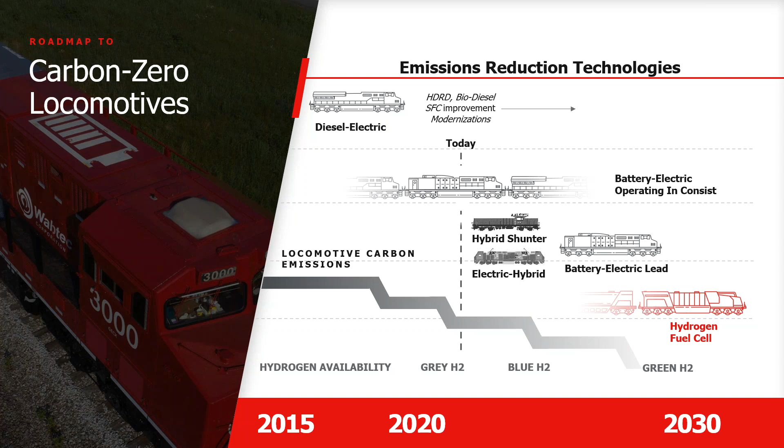Flex Drive journey started in 2007 with the introduction of Wabtec's first battery hybrid locomotive at the time, utilizing dynamic braking technology and building on many decades of manufacturing tens of thousands of diesel electric locomotives. So the move from diesel electric to fully electric seems like a natural move. And in addition to battery electric technology, Wabtec is investing in other emission reduction technologies such as hydrogen fuel cell and biodiesel.

Let's talk about the very first generation of Flex Drive, also known as Flex Drive 1.0. This is the first generation heavy haul battery electric locomotive. It was tested in revenue service with Class 1 Railway BNSF and CARB, California Air Resources Board. The locomotive completed over 13,000 miles, over 36 missions, saving about 11% of fuel, 6,200 gallons to be exact.

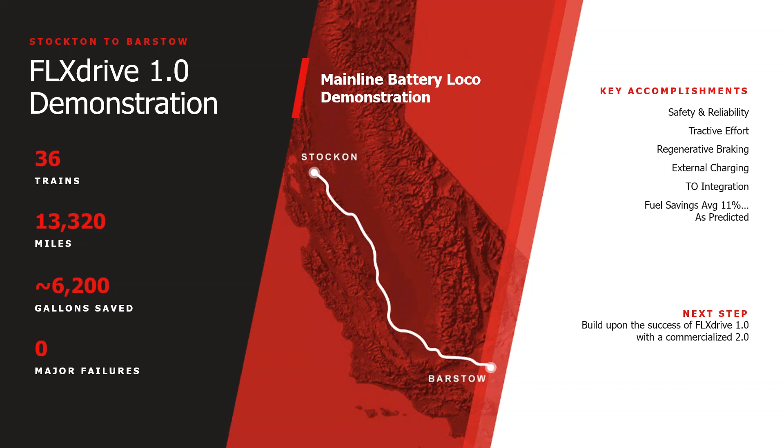The locomotive is able to operate in a consist of locomotives. So this is not a single operated locomotive. And it's managed by Wabtec Cruise Control System, also known as Trip Optimizer. And Trip Optimizer warrants its own presentation someday. Basically, Trip Optimizer within the Flex Drive operates the throttle and the braking utilizing real-time train load and terrain data to optimize battery usage and maximize regenerative charging power.

When we talk about the Flex Drive mainline locomotive, the success paved the way to the Flex Drive 2.0. This is another commercial battery electric locomotive that is able to deliver up to 8.5 megawatt hours of battery capacity with haulage capability of its diesel electric cousin locomotive. The Flex Drive 2.0 is also designed to replace a diesel electric locomotive within a train consist. Wabtec builds on its service-proven locomotive architecture with a new design of a liquid-cooled battery technology and thermal management system to optimize the energy performance and the battery life.

When we talk about various applications of battery electric locomotive, Flex Drive expands on other rail applications. That includes freight medium haul, yard and switching operations, which could include marine, ports, and terminals. And finally, we're deploying similar technology for passenger and transit applications.

Flex Switch is very relevant to today's conversation because in recent years, we are seeing a major push for ports and terminals to reach net zero by 2030 and beyond. For example, last year, Wabtec partnered with the Port of Miami and AAPA Latino in Santos to convey the very exact message.

Andy and Eric, if you're there, I want to say hello and thank you.

We're seeing similar trends in Canada and across the globe. For example, the expansion of the Port of Montreal in Contrecoeur, with an ambition and a mission to have a fossil-free port operation.

So a few words on this application. It's a diesel-electric switcher replacement with an AC traction system up to 32 tons per axle. Depending on the application, you may get a Bo-Bo or Co-Co configuration with 4 to 6 axles with single axle control, depending on the curves and the restrictions that you have in the vicinity of your port.

This is a 2.4 to 4 megawatt hour battery, with most applications needing only one charge per day, about 1.5 megawatt hours in 20 hours, and gives you ample time to recharge in the 2 to 4 hours to 90% capacity.

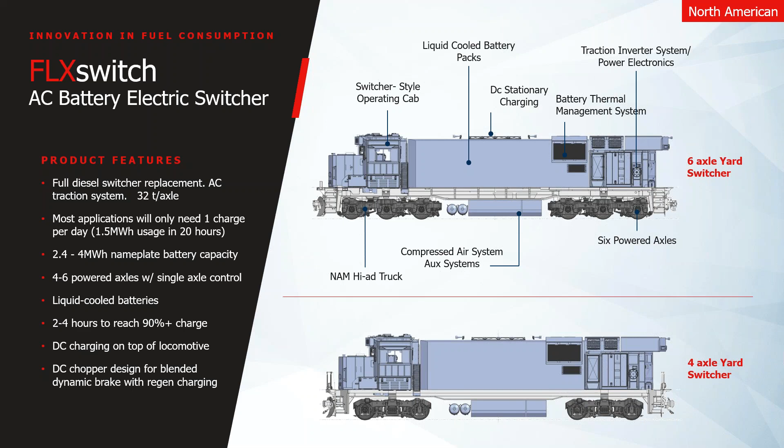When we talk about Flex Drive and Flex Switch, these are locomotives that feature DC fast charging systems, utilizing stationary pantograph or even a plug-in option that includes a moving charge capability for increased range and a non-interrupted operation. The battery system arrangement is modular and scalable and designed to integrate across multiple rail applications and vehicles to be able to provide some flexibility in the field.

Let's talk about adoption. When we talk about market adoption of FlexDrive, it's fair to say it takes a village. This is a major shift in technology, impacting how the transportation system operates and uses energy sources for its prime movers.

That's why Wabtec is partnering with strategic suppliers to push FlexDrive performance further and faster. We are partnering with public and private entities through grants and other funding opportunities to accelerate development of battery electric technologies. We are pleased to announce we have customers worldwide ready to integrate FlexDrive into their mission-critical operations.

Post the deployment of FlexDrive 1.0 and 2.0, customers are slowly dipping their toes into the technology across the globe. We're seeing customers such as Rio Tinto, BHP, Roy Hill, Canadian National, and Union Pacific, and we hope to share more of these exciting developments in the future.

With that, I will relinquish control of this webinar to Byron, so he can talk to us about smaller electrified vehicles, but equally just as important. Byron, take it away. Thank you, Sofiane.

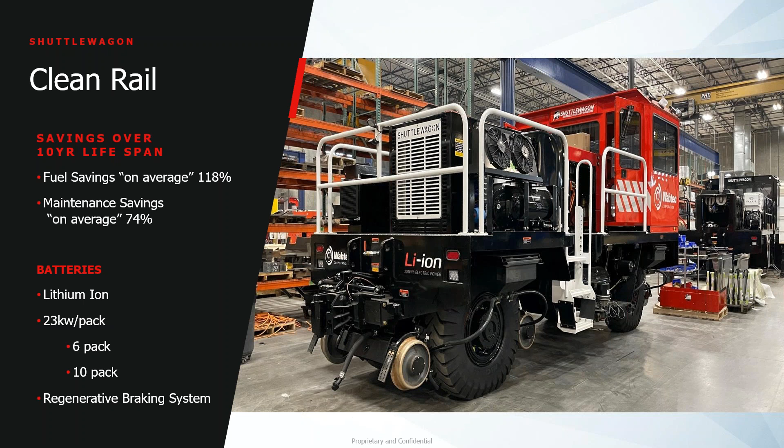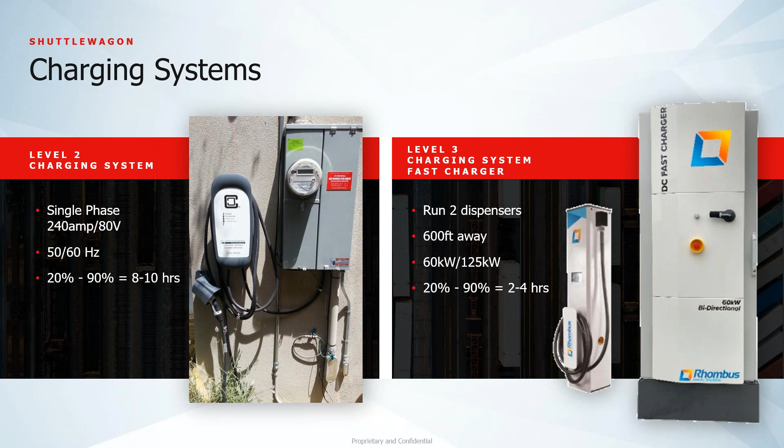Next slide, please. These are the two charging systems. We have a single phase, 240 amp, 80 volt system—that's what you could consider a trickle charge. The 20 to 90% charge rate is 8 to 10 hours. Those are more of a backup.

There's the upgrade to a Level 3. You can see the photo on the far right—that's the actual electric station, and in the smaller photo with the stand is the actual charge cable. You can run two dispensers at a time. You cannot charge at the same time, but it gives you almost 1,200 feet of difference to do the opportunity charge. With a fast charger, the 20 to 90% charge time is 2 to 4 hours, and you can also opportunity charge during your operation.

Our engineering department will be happy to work with you on your operation, to see how maybe you need a 15-minute longer break or a small interval where you can top up to finish your operation or your day. We do have applications running 6 units in California, and we've worked with them on adjusting their schedules to fit the time needed to move the rail cars.

Some applications do get regenerative braking back, up to 50%, so they can move that last string of cars. The current model will move up to about 30 loaded rail cars on a flat, straight track. We would definitely recommend a track survey to make sure this unit will fit, and to work with your port areas to understand there is an instant 100% tractive effort—once you push go, it's not a diesel engine, so there is a bit of a learning curve when you go to electric.

Next slide, and I will hand it off to the next one. Thank you.

Well, good day, everybody. My name is Greg Reese. I'm the North American Business Manager for Wabtec Maritime Electrification Products, including ferry charging systems, and the topic I'm going to discuss right now is shore power systems. I've been with Wabtec for nearly 9 years. I was an engineer at General Motors before that, and spent considerable time in the military and aerospace sectors before that.

As noted today, I'm going to briefly discuss shore power, known as cold ironing, along with some of the rationales for doing it, some of the challenges, and I'll briefly review some of the deployed units that we have in service at this time. Okay, we're off to the next slide.

As a result, there are commercial and financial incentives in place to increase the adoption of shore power and decarbonizing. Soon operators will have to pay for their carbon credits and their emissions, and as a result, the operators in cruise lines and such are approaching the ports and asking for shore power, making sure that it's available to them wherever they go. Next slide, please.

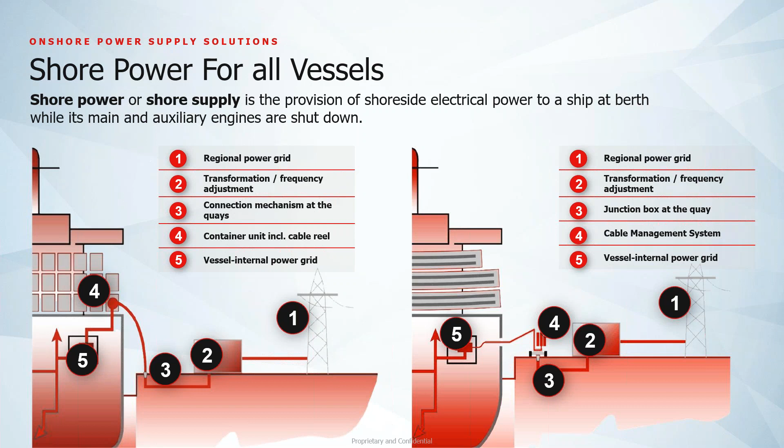Next slide, please. As I mentioned, one of the challenges is the docks. They are very inconsistent. I've been to many, many docks, and first of all, they tend to be very cluttered, have a lot of gear on them that you can't move.

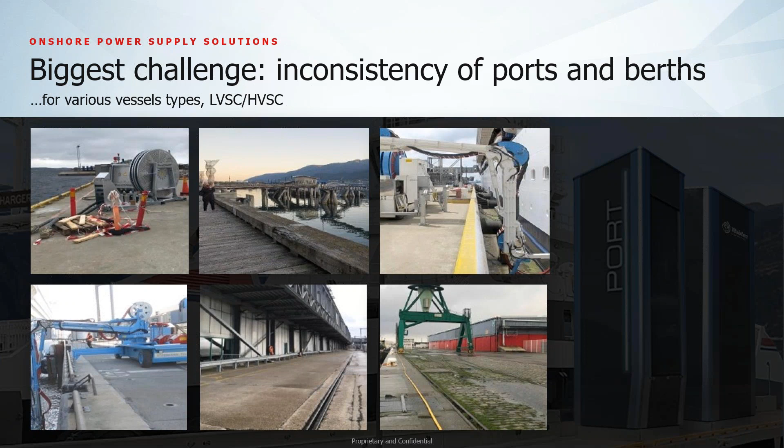And the one thing that we found that's very consistent is inconsistency. They're all built independently. They're all different terrains, different tides. Just each one is unique. Part of the problem, part of the challenge and the opportunity, is to make a system that can adapt to or be adapted to any of these berth challenges. Next slide, please.

A lot of times grid modifications have to be implemented. Sometimes additional power substations have to be created and things like that. So these demand a lot of power sometimes, and you have to make sure that that's done. Typically, most of the ports I've worked with are doing a feasibility study with the electric company at the front end of their project to make sure they have all that in place. Next slide, please.

Okay, so here is an example of a shore power system that we have deployed in Hamburg, Germany. I call it our most complete system because it's a mobile cable management system, and it doesn't have a junction box. It has an energy chain, which is a costly feature, but this dock doubles as a road during the day, and these plates have to handle 90 tons, and it can be operated by one person. I've done it. It's pretty cool. With the remote control, you can just drive it up and down the dock.

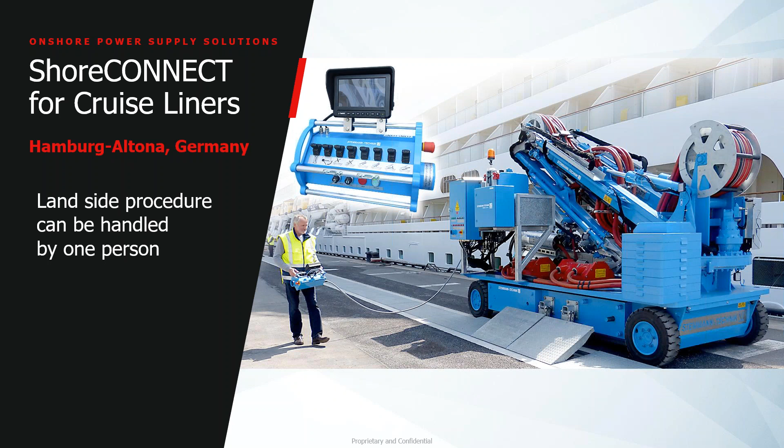So I'm giving you kind of high-level overviews because there's a lot of different kinds of equipment. And here's some more detail about the one in Hamburg. One thing to keep in mind, you'll notice the IEEE notification on this slide. Well, actually, I don't see it at this point, but these systems are all designed to IEEE 80005, which is a standard that's been adopted for shore power. Basically, that allows any cruise ship that adheres to the standard, is designed to the standard, to power up at any dock that is also built to the standard.

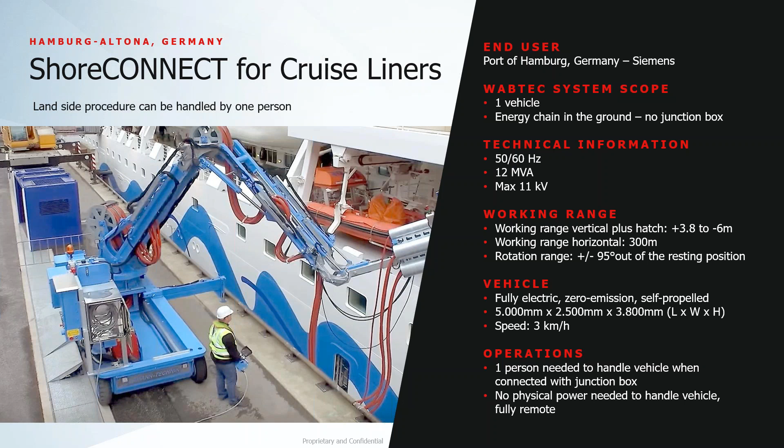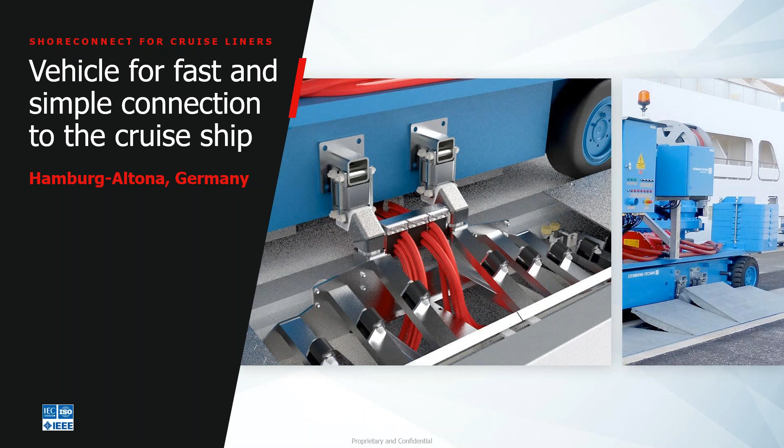Here's a little look inside the energy chain, just because it's kind of impressive. It was quite an undertaking, a lot of civil works and construction to install that. It's a very elegant solution, but certainly not the most cost effective.

This is a simpler solution when called for. Basically, it's a pedestal crane that just drops the cables out. Obviously it's much more cost effective than some of the shore power systems I just showed you, but obviously the aesthetics aren't there either.

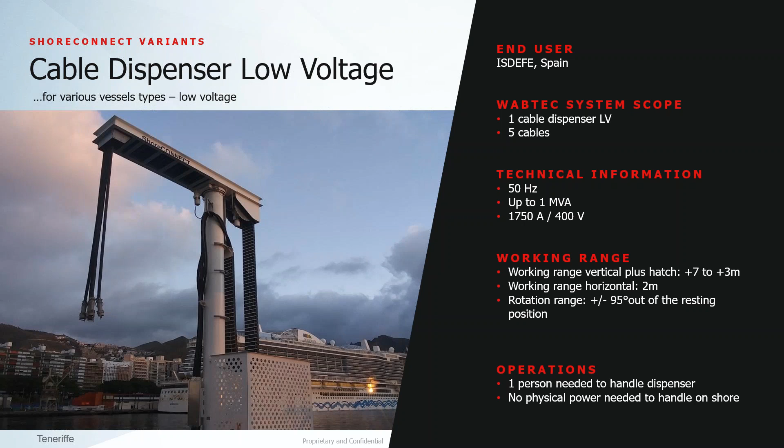This is a variation on the theme, kind of marrying together the articulating arms that are on the mobile units to a pedestal crane.

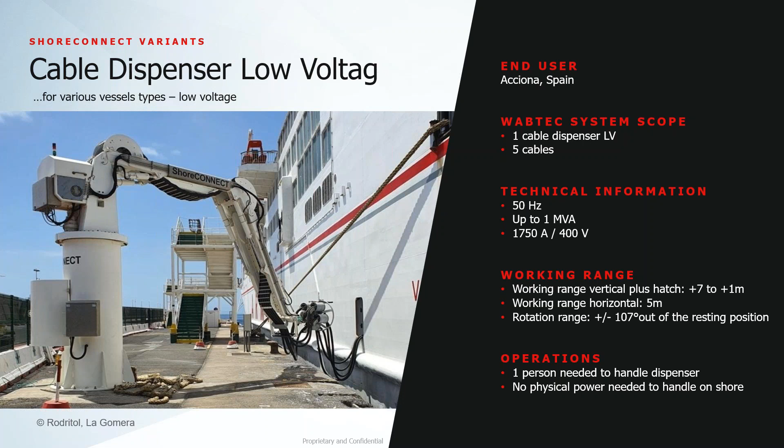This is a movable socket, primarily for cargo, but it can be for anything. The cable reel on top can traverse left to right, and it can account for hatch inconsistencies, because between vessel to vessel, or at least type, there are always going to be variances.

Here's a very simple unit that can be forklifted around a dock and deposited anywhere you have a junction box, and then you can marry it right up to the ship.

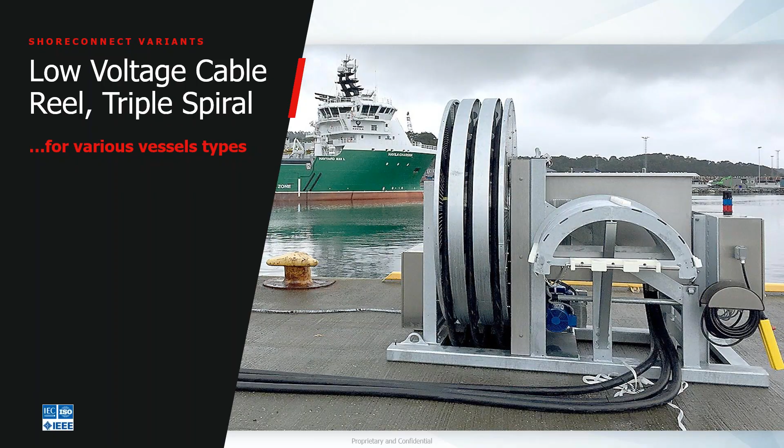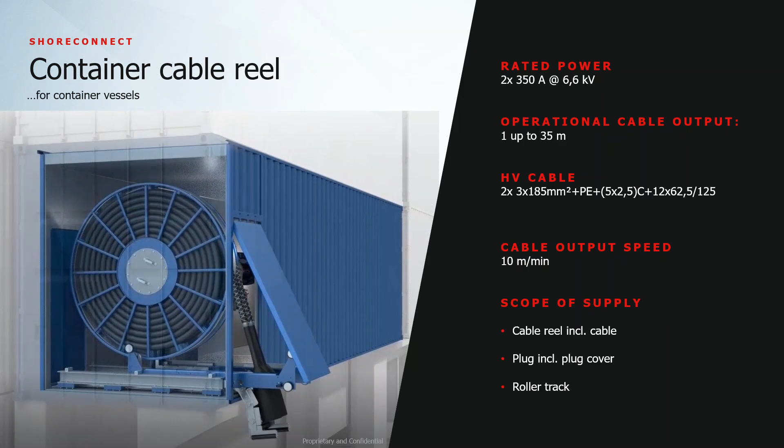Here's a real world example of one. One more, thank you. Here's a real world example of one. This is just an example of many that we've deployed out in the field.

On that note, I'll go ahead and close. I just wanted to give a brief overview so you could see what the equipment looks like and how it fits into the port. If you have any other questions, I'd be happy to answer them.

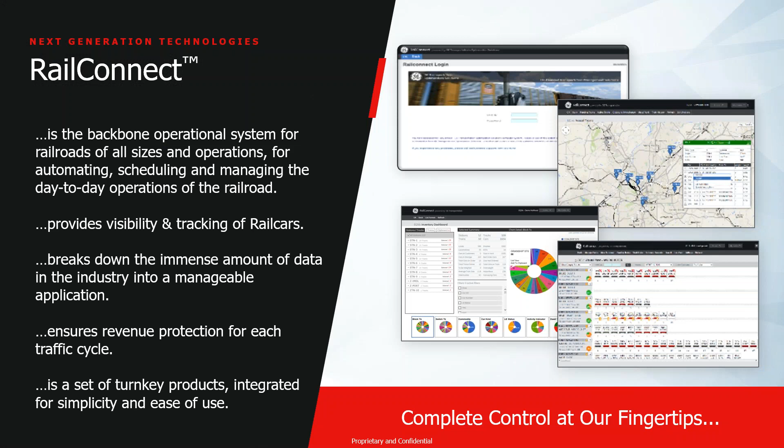As I mentioned, the suite of umbrella products is broken down into equipment management, revenue management, operations management, maintenance, and then comms or EDI, which is the tool by which all of these are integrated. So we'll start off in equipment management services.

We have both the car hire payables as well as a car hire receivables application, and we also do managed services too. And then we have an application that is called RVP, Rail Connect Visibility and Planning Plus, and that allows for shippers to request empty car ordering from their partner railroads.

In the revenue stream, we have a product called Rate Contract Management. Essentially, that's a rate negotiation tool between the shippers, the railroads, and all of the transportation partners within a given route or a given waybill. We manage both the freight as well as junction settlement revenue for ISS roads or junction settlement roads.

We also manage all of the IC or switch charges, incidental charges or switch charges for railroads. And that can be switching, could be cleaning, turning, you name it, whatever services the shippers are requesting.

As you go to the next slide, we'll kind of talk through how the process and technologies may change over time. But if you look at the screen here, obviously operations really don't change much across the board for intermodal. You're going to have your yard operations, your gate operations, and your ramp operations. We know processes do change, and with that, technology changes too. And what we've been seeing out there is that we have legacy technology that's decades old. As we go to the next slide, we'll walk through and show you how we're changing this and how we're trying to modernize this tool.

So looking at next gen TOS and the future where we're going with this tool, this is a web-based system, and looking at the technology and the architecture behind it, it's microservices versus a monolithic technology, where in the past you may have a single threaded code base. Here with web-based, it's simple, you can navigate, it's multi-tenancy, so instead of logging into various instances, you can change your terminal directly through the web app.

It is accessible through laptops, tablets, any of the mobile devices. We've modernized the cloud-based technology to make it easier to work with. You'll see that shortly in the architecture as well. Load planning has become easier. So we have a drag and drop functionality, and we'll walk through that a little bit as well. And then looking at additional features you can see on the screen, map-based interactions. This gives us a lot of flexibility for what we can do in the future. And we'll talk about where we're going with all this in the next few slides.

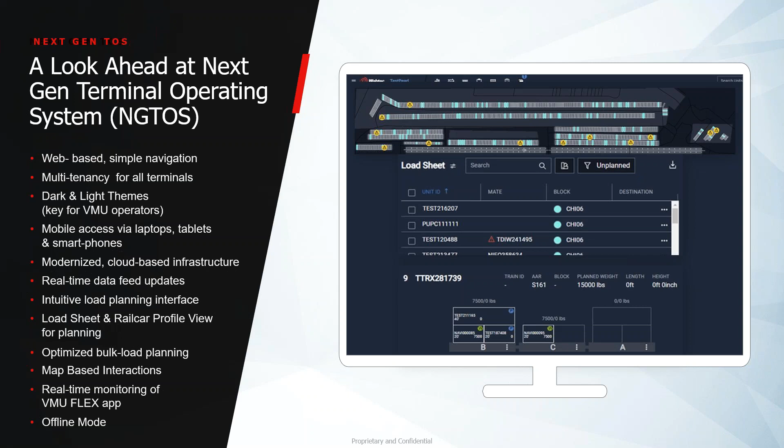So looking at the next slide, we'll walk through some key features of next gen TOS. And as we modernize this tool, you can see across the board, we have three types of sections out here that cover quite a broad base of tools that we have. So looking at work order and equipment management, this is really tied to how do you manage your terminal? How do you add equipment? How do you monitor equipment?

If you have operators, a hostler or crane operator, and you can see in the next section we have that as well, how do you manage that resource? How do you look at it from a visibility perspective and be able to monitor? So through this tool, you can actually monitor in real time what that operator is doing as well. Through this, you have work order management, which allows you to manage at the task level. It even goes into the next section for hostlers and cranes.

So they also have in the VMU a web-based tool very similar to desktop. It's shrunk down to fit into the VMU. You can see here also, as we talked about in the previous slide, we have dark and light themes. So you can see on the left side, we have a light theme, and then the next two sections over are dark. So this allows you to change that feature on the VMU so you can see it better.

If you're working during the day and you have some light issues, or even at night, you need a bit of visibility. The white screen may be too bright, you can do the dark theme, which makes it easier to see. So with the operators, they can come out here and they can see their work orders on the list. They also see on the map where they're located and also where that unit's supposed to be.

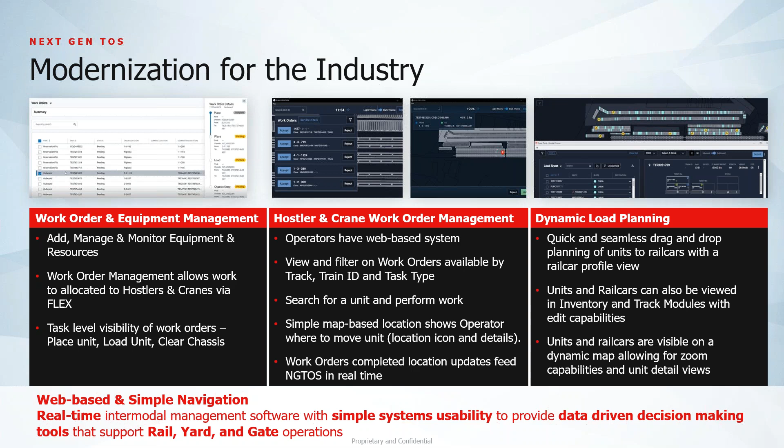So again, looking at this overall, it's web-based, it's simple. You can navigate through the tool. And as we go to the next slide, we'll see how it ties into the architecture. We really tried to make it a simple architecture; it's cloud-based. It's easy to access through desktop or even a mobile application like I mentioned before. It's highly available and scalable, even modular, portable and sustainable.

This gives us an opportunity to talk to you further about how this may fit with you. If there's an interest here, we can take the next step and talk about any opportunity you may see with this. If you want a deeper dive in technology, we can get our experts involved as well. We can walk through requirements, what you're looking for from deliverables, and really take some time to understand what your needs are.

When we talk about the supply chain, our team has been developing and working on the Port Optimizer for quite some time, and really got to understand the complexities at the port and the demands on the supply chain. This is why we developed and successfully deployed the Port Optimizer. It's an essential tool for ports and the ecosystem that it serves.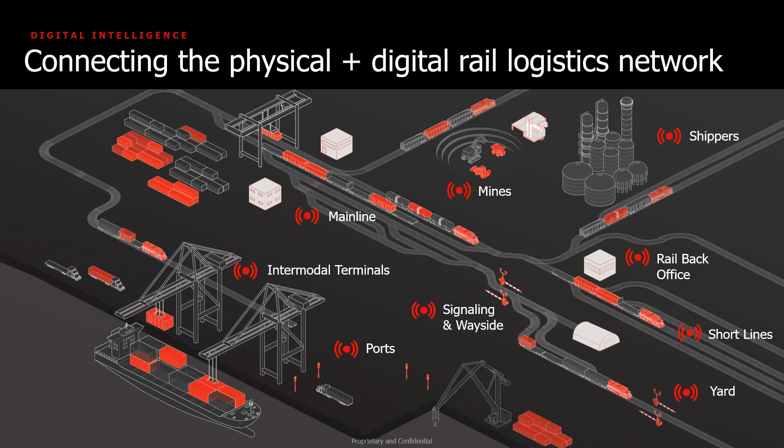Whether you're a landlord port or an operating port, a beneficial cargo owner, a trucker, a shipper, a railroad operator, the tool offers analytics that enables you to reduce cargo congestion, enhance your supply chain performance, predictability, and manage these exceptions, the cargo exceptions that require multiple phone calls, fax inquiries, and emails. And therefore, this really increases your competitiveness at the end of the day.

The tool ingests data from hundreds of different and disparate data sources into one single pane of glass to allow the port community system and its stakeholders to access this insightful, reliable, critical information to enable faster response in dynamic conditions. So Port Optimizer provides real-time vessel and container status, provides terminal and port performance dashboard, empty container management, and a 6-month forecast.

The major foundation of the Port Optimizer remains its data, and that is the data coming from hundreds of data feeds that could be coming from cargo lanes, from terminal operators, port operators, could be from the Port Authority itself, from Customs and Border Protection, and then really taking all that data, ingesting it, and providing it in a modern UI and API connections for the ports and the customers and the users that already have a port community system or have a system that they're using on a daily basis. They don't have to add another system. Therefore, we use APIs to provide that capability.

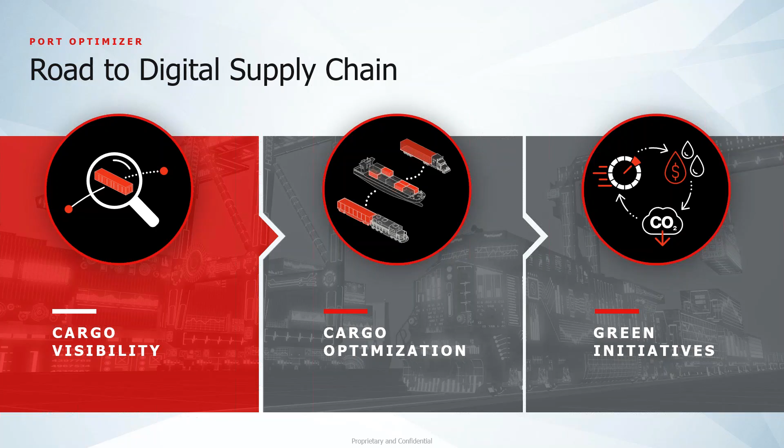So when we talk about the track and tracing being the foundation, again, this is the real-time container tracking from marine to terminal. It would involve both import and export visibility, using container-specific details as a unique identifier with various features and highlights such as ETAs and holds and availability to allow you to avoid detention and demurrage, for example.

The cargo optimization goes into the higher level, macro level of the port and the terminal, and you get to see dashboards that are designed to provide intelligence at the port level. It enables the port to make these decisions using real-time cargo data, and avoids the nitty-gritty details of working through Excel and emails to find multiple transportation modes. Last but not least, we provide actionable KPIs and BI that are very specific to each customer and user function to cater to their needs on a daily basis.

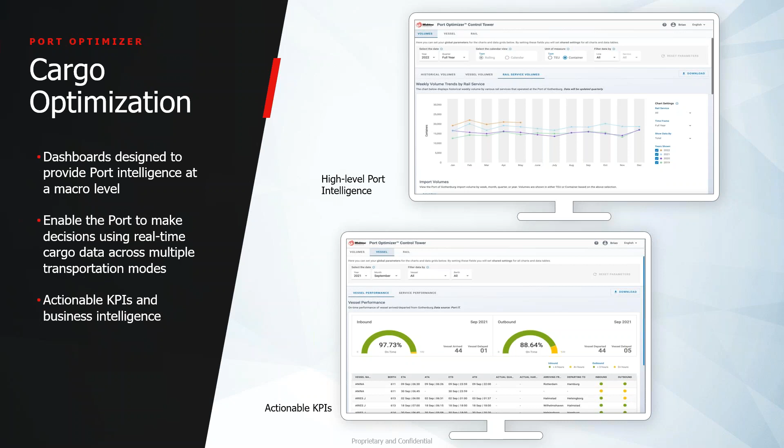Port Optimizer is able to interface with some of the hardware that we have discussed today, with terminal operators, with the Port Authority and terminals, based on equipment like the shore power that we discussed today with Greg. And it offers a cleaner, greener module that enables the port community system to use big data to establish green cargo movement while providing analytics and the environmental impact of cargo moves.

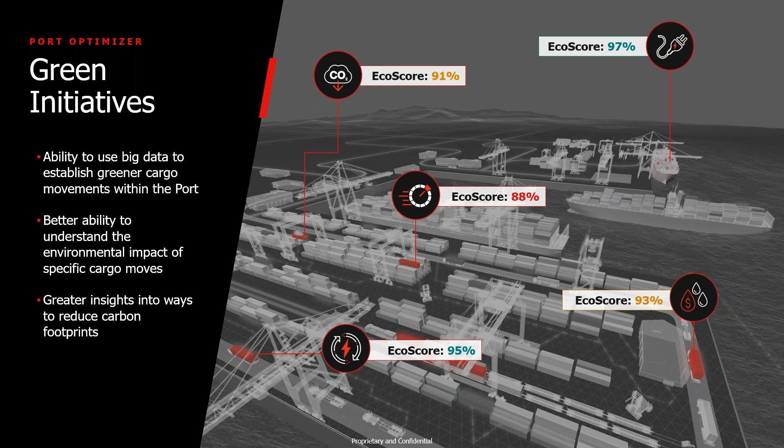Again, we get to understand a little bit more about the way each cargo is moving and assign an eco score, if you will, to make us smart about how we can reroute our cargo in a very efficient and green manner. This really kind of highlights the overall vision and the mission of the Port Optimizer, starting from a very cargo asset specific, going into the cargo optimization, and really working towards the environment protection there.